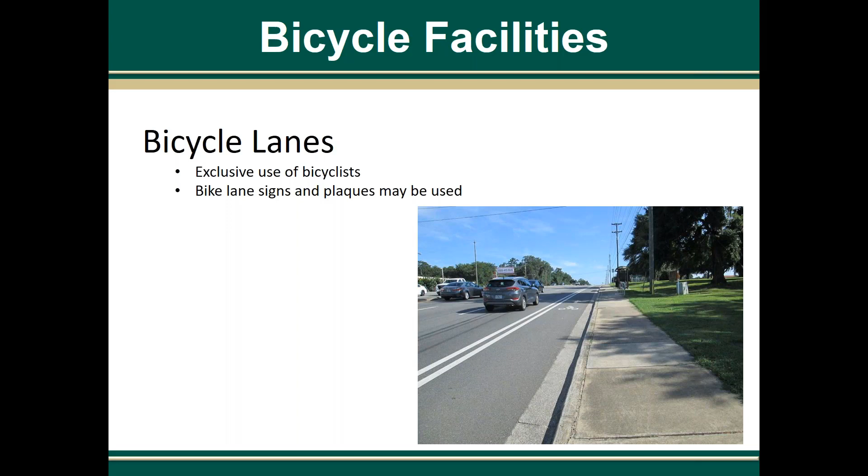We clarified in the bicycle lanes section that bicycle lanes are for the exclusive use of bicyclists. Previously, it had said that they are for the preferential or exclusive use of bicyclists. Also, we no longer say bicycle lanes are designated by pavement markings and signage. The signage is optional. In the pavement markings and signage section, we ask people to go to FDM 230.3.1.3 for information on placing markings on concrete surfaces.

In the Keyhole Lanes section, we added language saying that on curbed roadways that do not have a bicycle lane approaching the intersection, consider providing a 17-foot right turn lane for development of future bicycle facilities. So if there isn't a bicycle lane leading up to the right turn lane, there wouldn't be a keyhole lane, but we might anticipate that a bike lane would go in the future, and instead of having to move the curb, we can allow that space now.

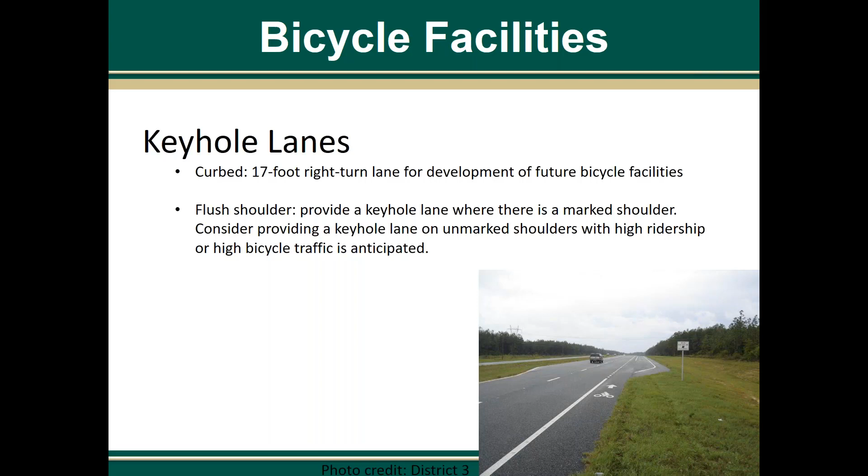In the flush shoulder section, a keyhole lane must be provided if there is a marked shoulder. Consider providing a keyhole lane if there is high bicycle ridership or high bicycle traffic is anticipated in the future. We labeled Exhibit 223-3 of green-colored pavement. Now you can see the drawings are labeled A through E, and this has been done to make it easier to reference the different drawings in conversation or in text.

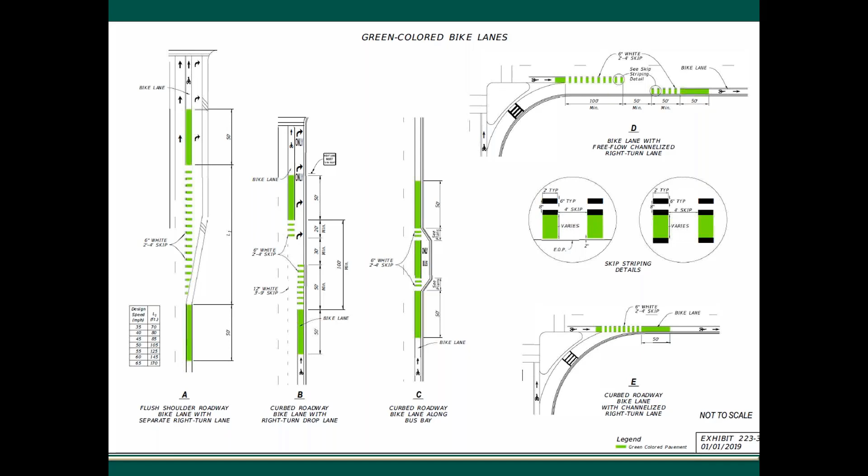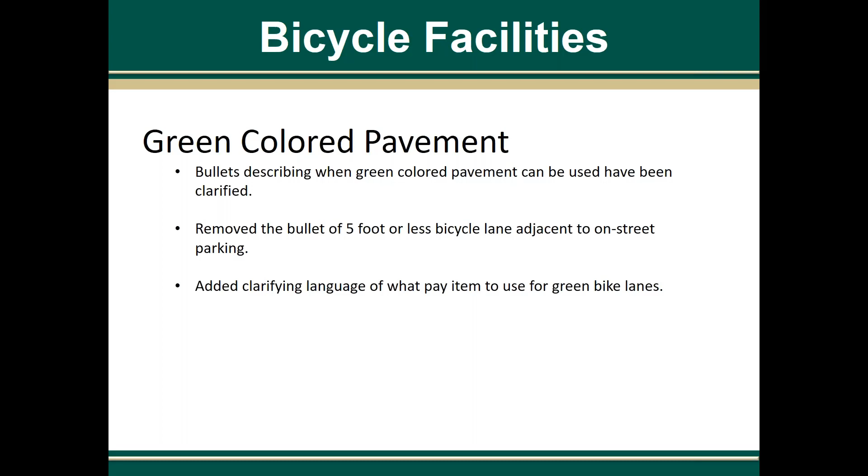Also in the green-colored pavement, the bullets describing when green-colored pavements can be used have been clarified. So we did a little reorganizing there, and then we removed the bullet saying that green colored pavement can be used if there is a bike lane adjacent to on-street parking that's 5 feet or less. We removed that bullet because we hope not to see that. What a bike lane of that narrow width would do is have the cyclists be too close to the parked cars. They may get hit by a car door opening, so instead we would want there to be a buffer. Lastly, we added some clarifying language of what pay item to use for the green bike lanes.

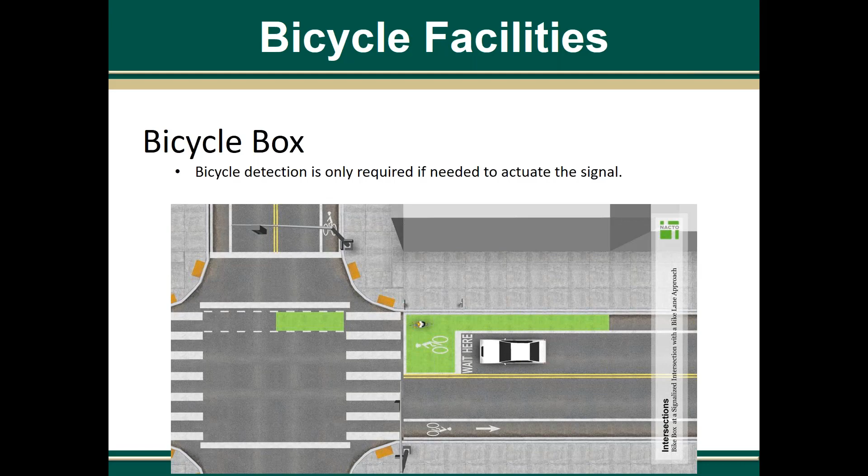In the bicycle box section, bicycle detection is only required if it's needed to actuate the signal. So if signals are pre-timed, then bicycle detection is not required. Same thing with the two-stage turn boxes. If bicycle detection isn't required to actuate the signal, then that's not needed.

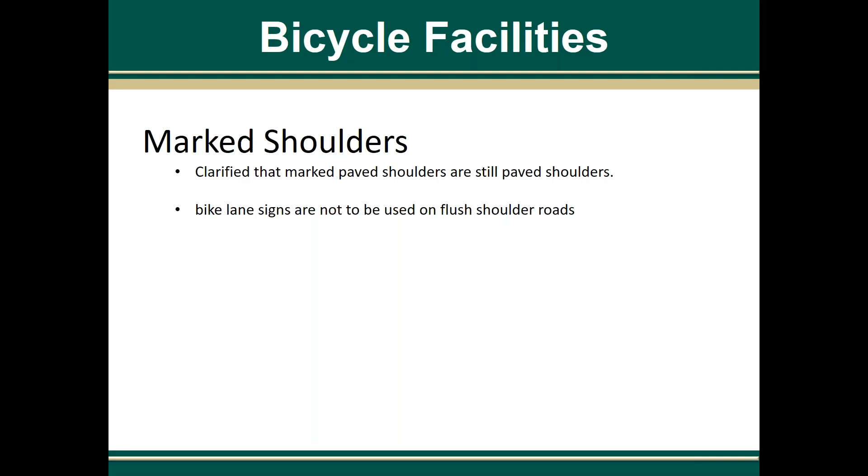In the paved shoulders section, we clarified that paved shoulders also are there to serve errant vehicles. Also, we changed the section you would refer to for more information when audible and vibratory treatment is next to a paved shoulder serving as a bicycle facility. Where you would now go for more information is FDM Chapter 210.4.6. And lastly, we created a new paved shoulder subsection called marked shoulders. The main reason for the marked shoulders subsection is to clarify that a marked paved shoulder is still a paved shoulder. It does not become a bicycle lane. Therefore, bike lane signs are not to be used on flush shoulder roads.

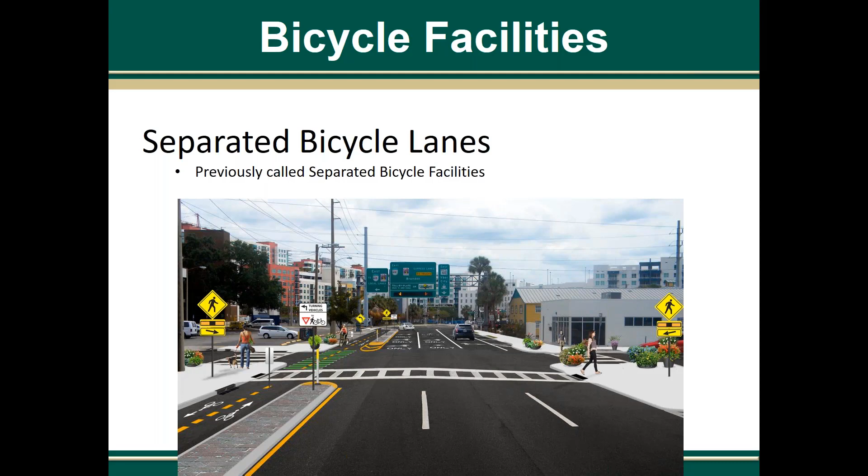The section previously called separated bicycle facilities is now called separated bicycle lanes. The information has stayed the same. The bicycle facilities chapter has a new section called on-street parking. This information was relocated here from 210.2.3. We also changed the language a little bit to make it more clear what the design specifics are of on-street car parking and the adjacent bicycle facilities.

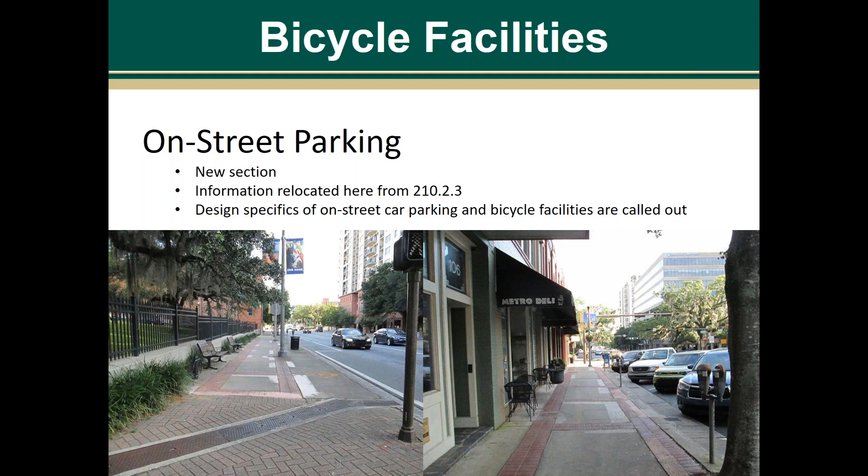Lastly, we removed the language application pending next to US Bicycle Route 15 in the US Bicycle Route System section. That's because the US Bicycle Route 15 Phase 1 was approved in the fall application cycle of 2018. So those are all the changes in the Bicycle Facilities chapter of the FDM, Chapter 223.